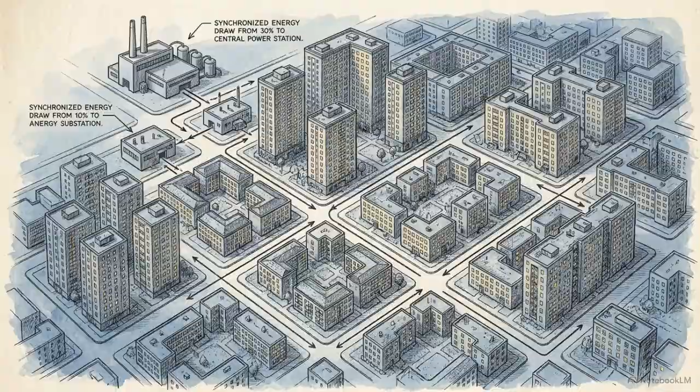You wake up, turn on the coffee maker, flip on the lights, and thousands of other people in your city do the exact same thing at the exact same minute. For the electrical grid, this coordinated morning routine is a high-wire act. If demand spikes too sharply, the whole system can buckle under the stress.

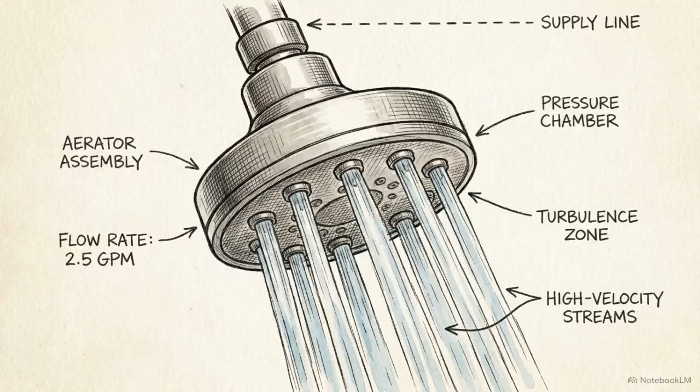Contrast that fragility with how you get your morning shower. In many cities, the municipality only actively pumps water for 1 or 2 hours a day. Yet when you turn the tap, water flows 24 hours a day.

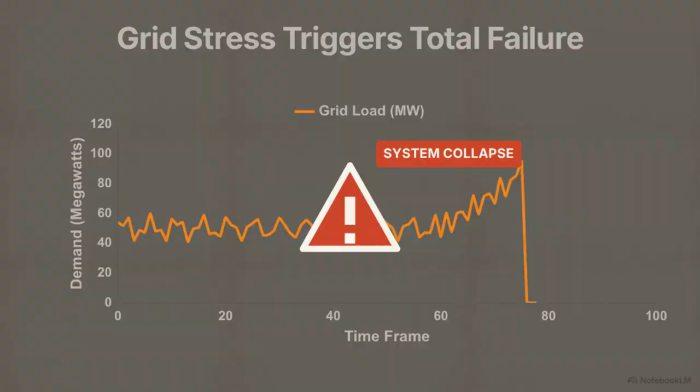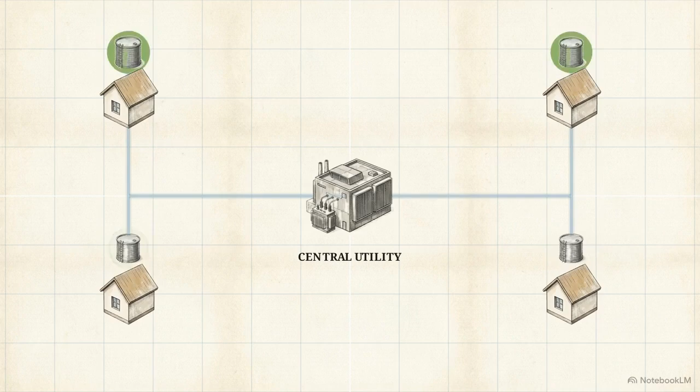While storing an electron is technically harder than storing a liter of water, the reliability gap stems from the architectural logic used to distribute these resources to our homes. These overhead tanks are a constant of the residential skyline.

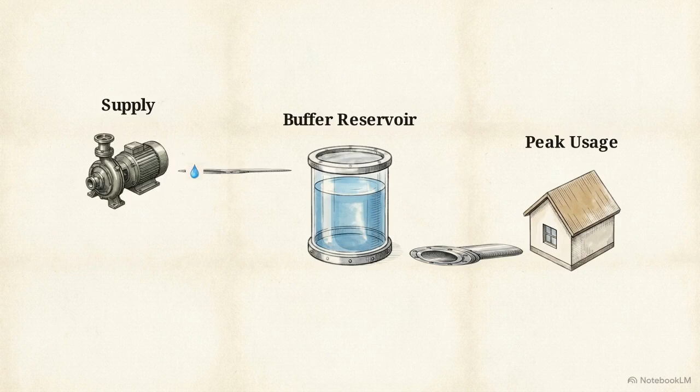This diagram shows the logic of decoupling. A small input pipe slowly fills the reservoir while the city pumps. Then, during a peak usage event, a much larger output pipe drains it rapidly. The tank separates supply time from usage time.

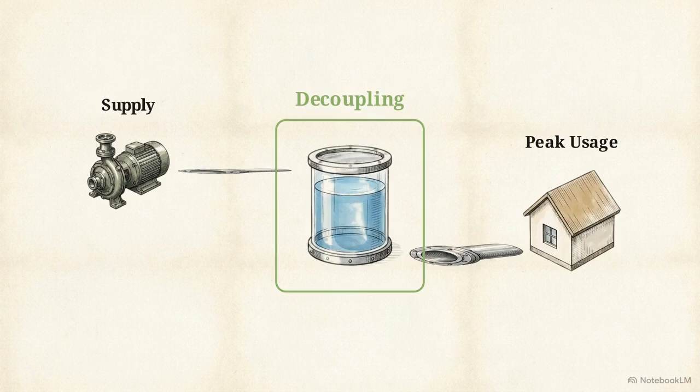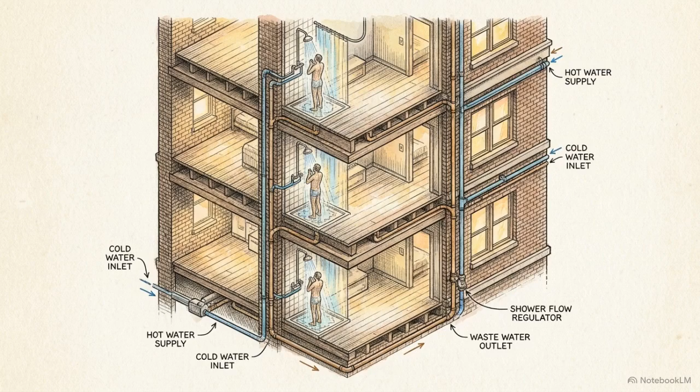Because of the local tank, an entire city can turn on their showers at 8 a.m., and the municipal pump never feels the surge. The rooftop reservoir absorbs the shock.

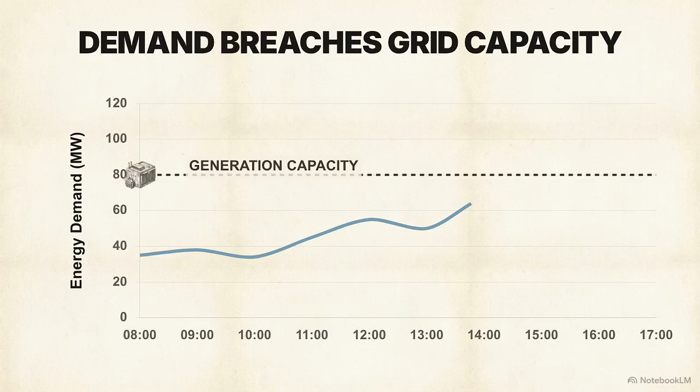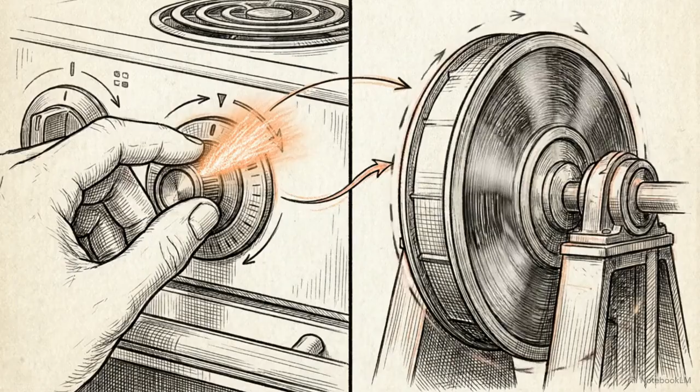The electrical grid is a just-in-time system without a reservoir. As this consumption line spikes, it breaches the generation capacity, triggering system-wide stress. Without a buffer, every time you turn on an appliance, a power plant miles away must instantaneously generate that exact millisecond of required energy. Millions of homes already possess the hardware needed to fix this.

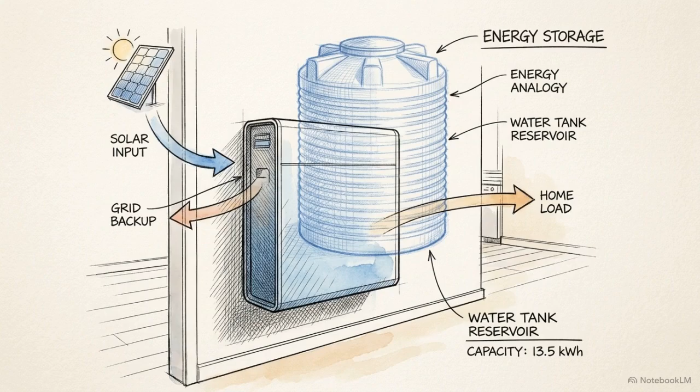The home inverters and battery units in our living rooms could act as electrical overhead tanks. But we treat these batteries like borewells. We leave them sitting idle, waiting to be used as an emergency backup when a grid failure forces us to light a candle.

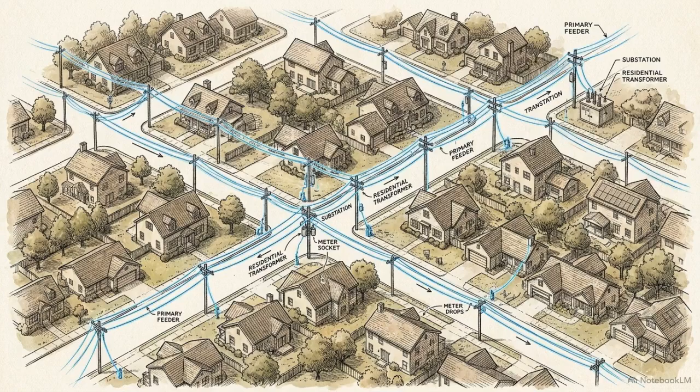Attempting to balance a grid without a consumer-side reservoir forces the utility to manage the entire load's volatility at the source. A resilient network requires energy storage to be integrated into the last mile of the system, the point right before the power reaches your appliances.

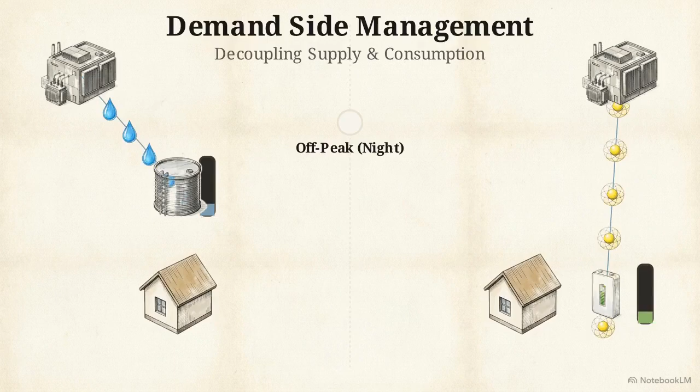Applying reservoir logic is demand-side management. Left, water fills a rooftop tank off-peak. Right, a battery draws steady grid power at night. At 8 a.m., the household draws heavy power from the battery, like the tank. The grid connection remains flat, shielding the utility.

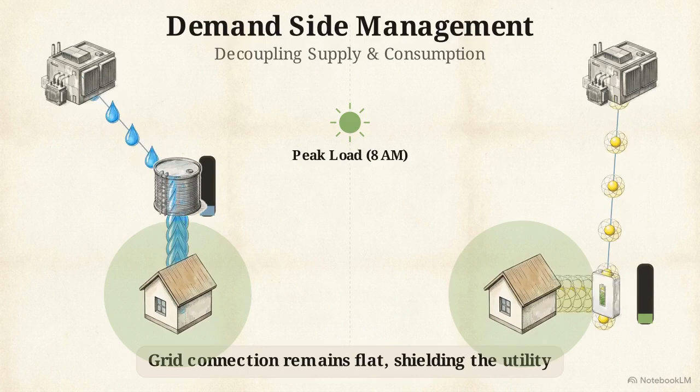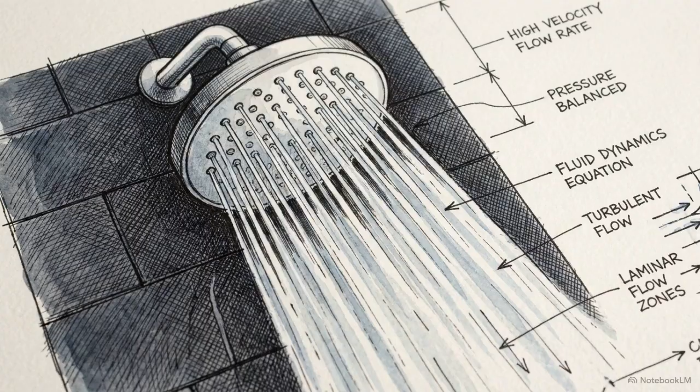This shift requires no new physical principles. We already own the hardware, and the physics are proven every day in our bathrooms. A stable energy future requires us to look at our plumbing, adjust our logic, and start treating the electron like the water molecule.